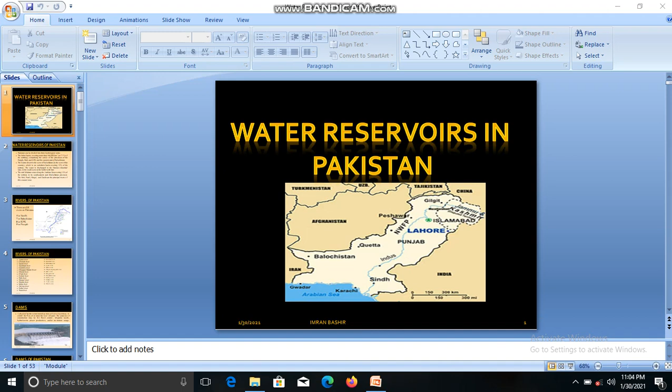Water reservoirs of Pakistan. Pakistan can be divided into three hydrological units. The Indus Basin, covering more than 71% of territory, comprising whole of Punjab, Sindh, KPK and eastern part of Balochistan.

The Kharan Desert in the west of Balochistan, which is an endorheic basin covering 15% of territory.

The water discharges into Hamun Mashkel Lake in the southwest at the border with Iran. The arid Makran coast along the Arabian Sea covers 14% of territory in southwestern Balochistan province. The Hab, the Porali, Hingol and Dasht are the principal rivers of the coastal zone.

Rivers of Pakistan. Pakistan has 24 rivers: 4 in Sindh, 7 in Balochistan, 8 in KP and 5 in Punjab.

The main rivers of Pakistan are Indus and its tributaries, but there are other rivers such as Astore, Chenab, Dasht, Dashtari, Gambila, Chagad, Hakra, Ghizar, Gilgit, Gomal, Hab, Hingol, Hamza, Kabul, Swat, Kundar, Kunar, Kurram, Layari, Malir, Panjkora, Ravi, Shigar, Shimshal, Satluj, Sawan, Tochi and Zhob.

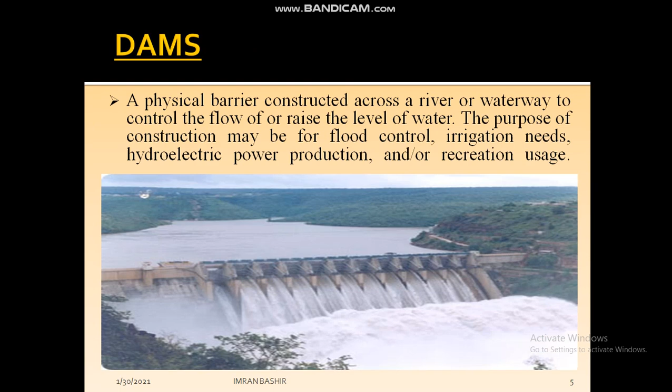There are so many dams in Pakistan including Mangla, Akra Kaur, Burj, Garuk, Hingol Dam, Hub Dam, Mirani Dam, Naulong Dam, Damis, Satpara, Ghabir, Kalabagh.

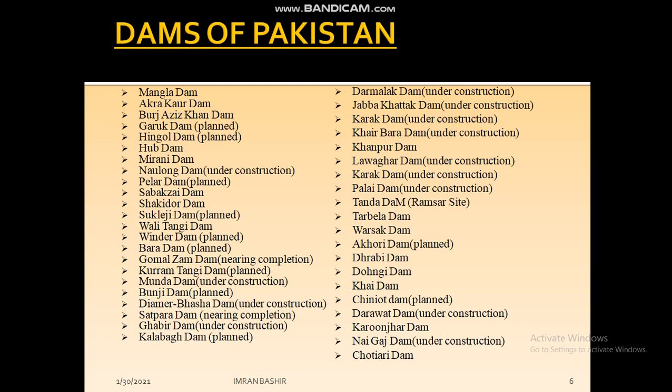In future: Karak, Palai, Tanda Dam, Tarbela, Warsak, Dhrabi, Dohngi, Khai, Chiniot, Darawat, Karoonjhar, Nai Gaj, Chotiari.

Barrages: a type of dam which consists of a line of large gates that can be opened or closed to control the amount of water passing the dam. Only used for irrigation system and storage of water.

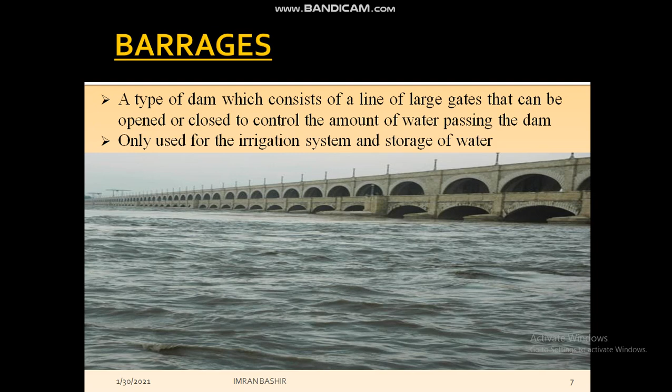The treaty made a simple and straightforward attempt to let both adversaries share the available water resources. The divide was clear between the east and the west. The three western rivers were allocated to Pakistan with some reservation, and the three eastern rivers were given to India. The treaty fixed the rights and obligations of India and Pakistan in relation to each other.

India has been using on average 33 million acre feet of water from the eastern rivers and has built several dams and barrages to supply water to its Punjab province along with its neighbouring states.

The project was sponsored by UK, Germany, Australia, New Zealand and Canada and was administered by IBRD, International Bank, the World Bank.

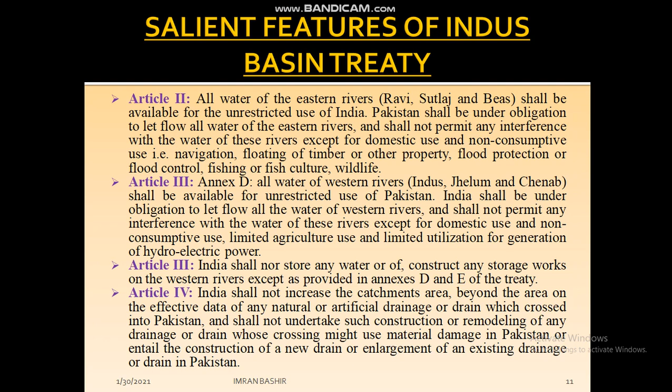India shall not undertake such construction or remodeling of any drainage or drain whose crossing might cause material damage in Pakistan, or entail the construction of a new drain or enlargement of an existing drainage or drain in Pakistan.

Eastern and western tributaries, rivers, dams, barrages: Pakistan and India's dispute over the water.

Baglihar Dam project located on the Chenab River, built by India in Jammu and Kashmir. Construction is said to be somewhere between one-third and one-half complete. This is considered a violation of the Indus Basin Treaty.

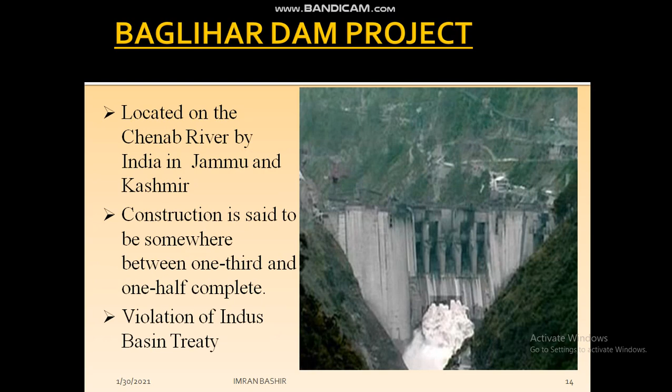Causes of conflict: the design of the hydropower project violates the terms of the Indus Water Treaty, as the submerged gates, spillway and other structures will increase India's storage capacity far beyond what is allowed under the agreement.

The dam would increase India's storage capacity to 164,000 acre feet, which is much higher than the agreed capacity under the treaty.

Baglihar Dam's planned height is about 144.5 meters, which could interfere with the flow of water into Pakistan.

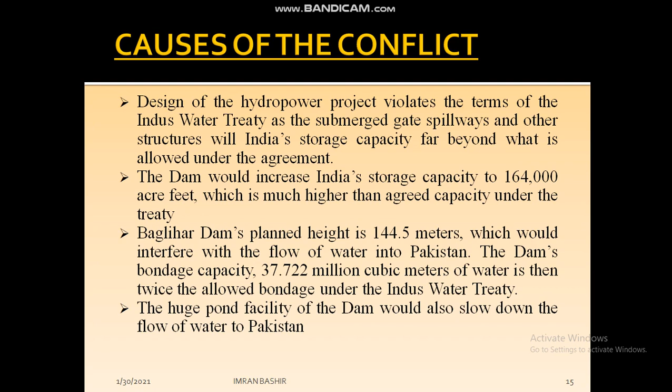The dam's pondage capacity is 37.722 million cubic meters of water, which is twice the pondage allowed under the Indus Water Treaty. The huge pondage facility of the dam would also slow down the flow of water to Pakistan.

Construction is said to be somewhere between one-third and one-half complete.

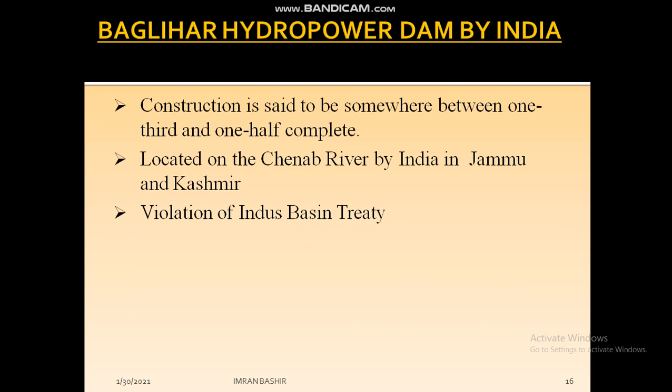Indo-Pakistan dispute on Baglihar Dam. Pakistan's contention is that the Baglihar hydropower project allows India more water storage than agreed. India says that the project meets the criteria laid out in the 1960 Indus Water Treaty.

Pakistan has requested the World Bank to appoint a neutral expert to resolve the difference with India over Baglihar. The World Bank said that it is not a guarantor of the 1960 treaty, and that the difference would be referred to a neutral expert under the laid down procedure.

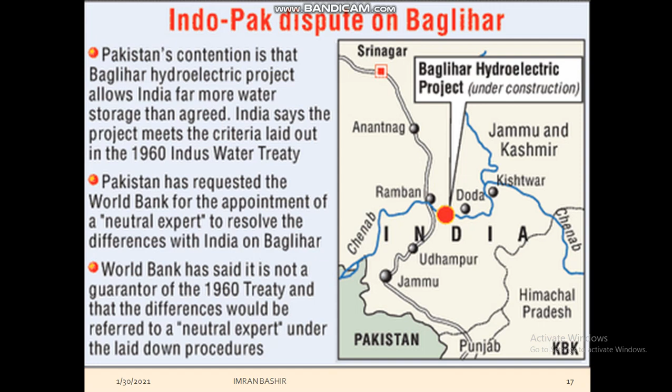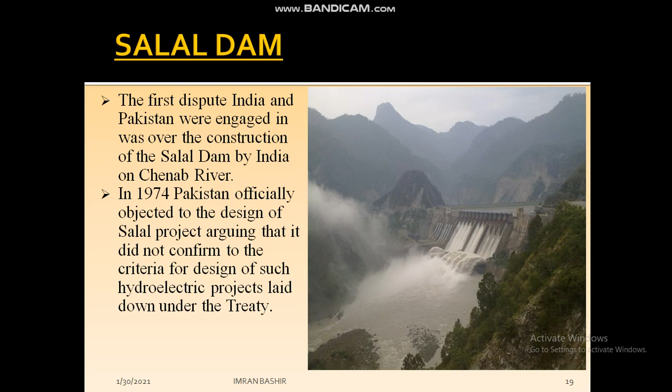In 1974, Pakistan officially objected to the design of the Salal project, arguing that it does not conform to the criteria for design of such hydroelectric power projects laid down under the treaty.